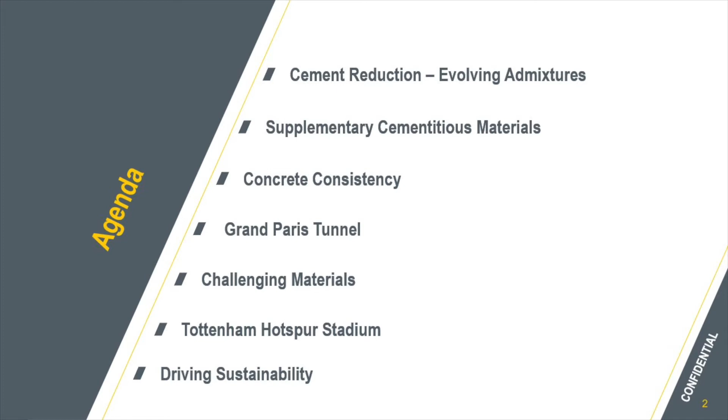We have been a leader of construction chemicals in the UK since 1997. Being one of the first companies to invest in their own polymer reactors has enabled us to be at the forefront of admixture polymer advancement. Through this, we have been working closely with Tarmac to be the leader in sustainable construction solutions. The agenda is cement reduction, supplementary cementitious materials, concrete consistency, Grand Paris Tunnel, challenging materials, Tottenham Hotspur Stadium, and driving sustainability.

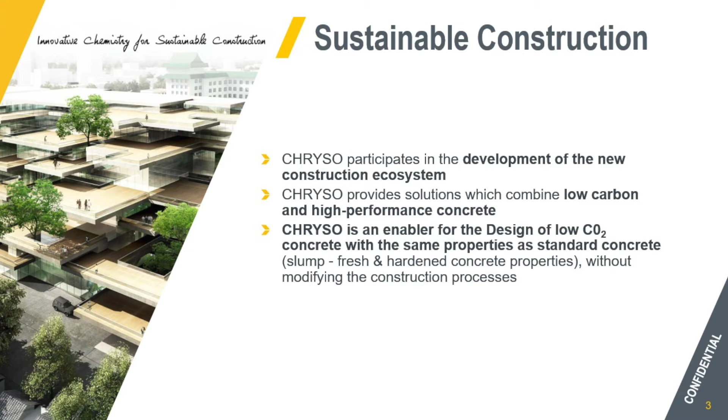Sustainable construction. We have taken a cradle-to-grave approach on the construction industry to find new ways we can help improve sustainability, whether that is to improve a building's design life, improve durability and robustness, or allowing concrete mixes to utilise recycled materials and repurpose waste materials from other industries. We provide solutions which combine both low carbon and high performance technologies. Our admixtures and services enable Tarmac and the construction industry to focus more and more on environmentally efficient concrete designs without affecting usability.

Cement reduction evolving admixtures. One of the first areas to look at for reducing CO2 is the use of cement. Concrete has a relatively low carbon footprint compared to other industries, but it is one of the most widely used construction materials. The addition of admixtures has enabled a reduction of the cement content in concrete, reducing its carbon footprint. For many years, water-reducing admixtures have been used to improve the water-cement ratio of a mix. This increases the concrete strength, enabling a reduction in the amount of cement required.

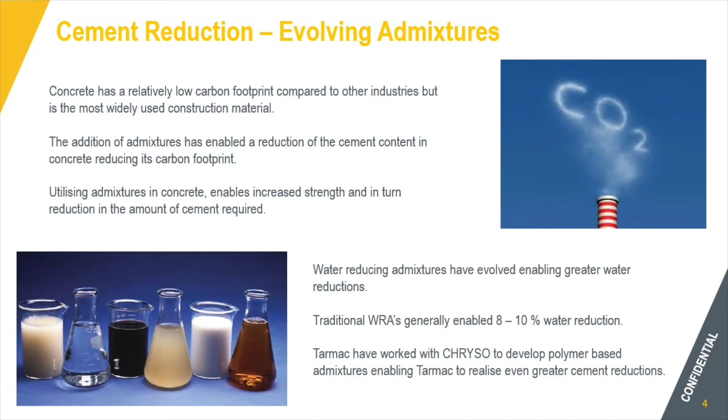Admixtures have evolved to be more powerful, offering greater water reductions. Traditional lignosulfonate admixtures gave a water reduction of around 10%. Today's polymers can reduce water by up to 40%, therefore allowing even greater reductions in cement, but still offering the required concrete performance.

Supplementary cementitious materials. SCMs, or supplementary cementitious materials, are byproducts from other industries. These materials give other benefits to concrete, such as chemical resistance, but also have strength-gaining properties similar to Portland cement. These materials change the chemistry of the concrete mix, so specially developed admixtures are used by Tarmac to ensure the rheology and technical performance are still maintained. This allows the CO2 footprint of mixes to be substantially lower than traditional CEM1 designs. The most common of these SCMs in use today is GGBS. This is a waste product from the iron industry and, depending on requirements, can replace anywhere from 20 to 95% of the CEM1 content.

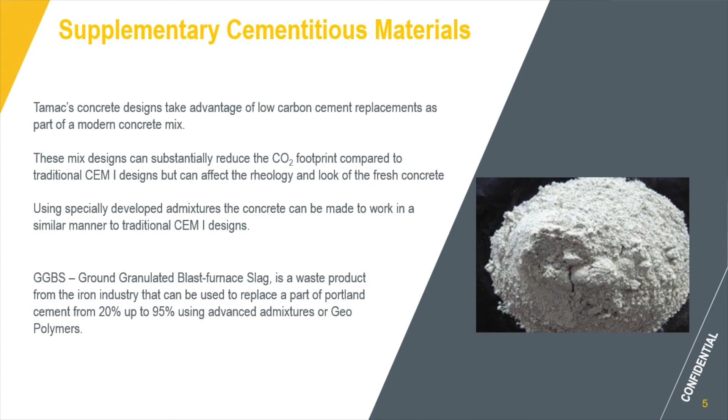Concrete consistency. Tarmac's use of Chryso's latest admixtures allows the concrete's consistency to be maintained for up to 10 hours. This ensures that deliveries will not be rejected at site, saving time, money and pollution. So why is this important? A vitally important aspect of the mix design is to ensure that the concrete arrives on site at the same consistency as it was batched. This can be difficult to achieve if the correct admixtures are not used and the load is delayed by traffic or the job site. This means loads may be rejected and returned back to plant. This is not only a financial problem but also increases pollution with the extra loads being trafficked.

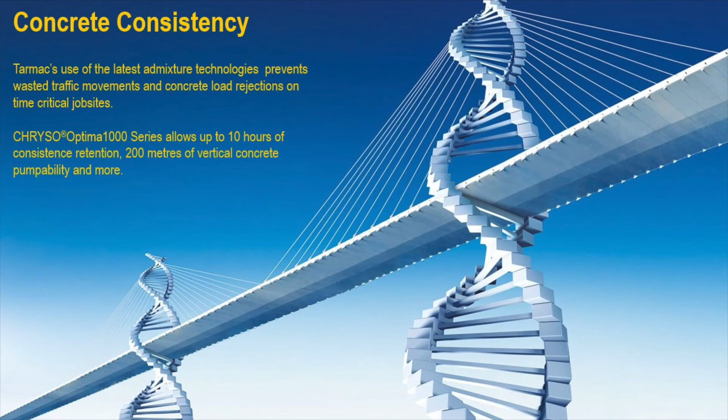The Grand Paris Tunnel was a group of new rapid transit lines. The project comprised new lines plus extensions to existing lines 11 and 14. A total of 200 kilometres of new track and 68 new stations were added, serving a projected 2 million passengers a day. It was the largest urban project in Europe, involving Chryso in partnership with Tarmac's parent company, CRH. In order to minimise traffic movements and prevent rejected loads, concrete with a low viscosity and a workability of up to 10 hours was required. This was achieved using Chryso's Optima 1000 series technology.

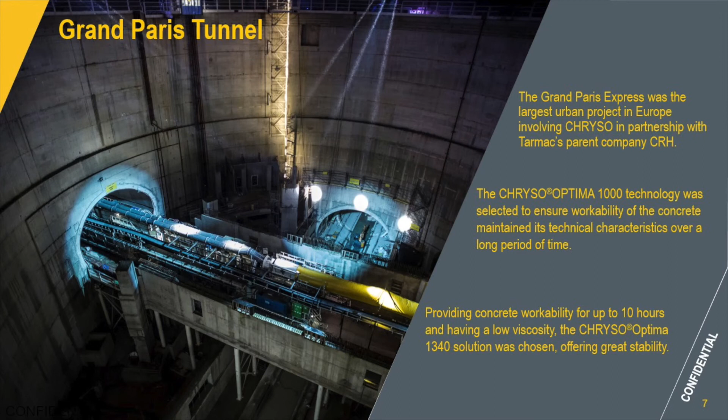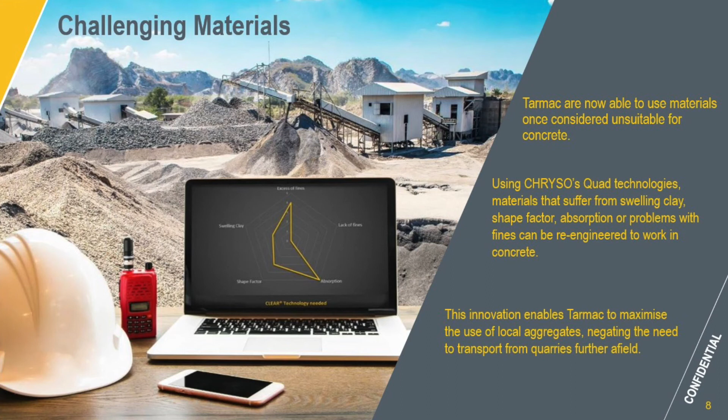Challenging materials. Although aggregate and sand are two of the main constituents in concrete, the materials must be of a particular type, shape and particle size. Without this, the concrete may not achieve its design strength and consistency. This means that quarries have stockpiles of materials that are considered low value because they are unusable in concrete. To overcome these issues, Tarmac is now utilising Chryso's Quad range of admixtures. Using Quad technology means that low value materials that suffer from swelling clay, shape factor, absorption or problems with fines can be re-engineered to work with concrete. This maximises the use of local aggregates, negating the need to transport materials from further away.

Tottenham Hotspur Stadium. The new Tottenham Hotspur Stadium commenced its build in 2015. Tarmac supplied the ready-mix concrete for the project. During the piling stage of the build, rather than use fresh virgin aggregate, excavated material from the site was repurposed using Chryso's Quad 20 admixture for 14,000 cubic metres of the concrete. This not only saved considerable time and money, but also reduced an estimated 12,000 truck movements.

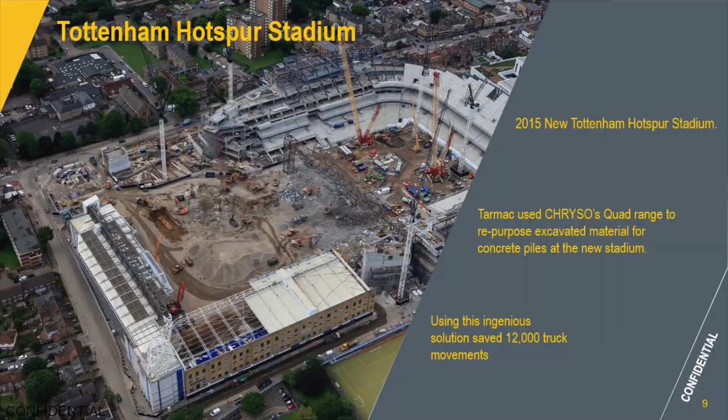Chryso and Tarmac drive sustainability for the future. Chryso believe in a sustainable construction cycle, and we utilise this ethos to help Tarmac achieve their sustainability goals. Our sustainability pillars are reduction of carbon footprint, reducing CO2 in cement and in concrete whilst improving overall energy efficiency. Densification of construction, the ability to deliver concrete with the correct specification wherever it is needed. Enhancing building materials, giving concrete properties that are most suitable for its environment, whether that is pumping long distances or overcoming transportation issues.

Circular construction, the use of admixtures to enable the use of recycled materials, local challenging aggregates, and wastewater treatment and capture. Chryso and Tarmac working for a sustainable future.